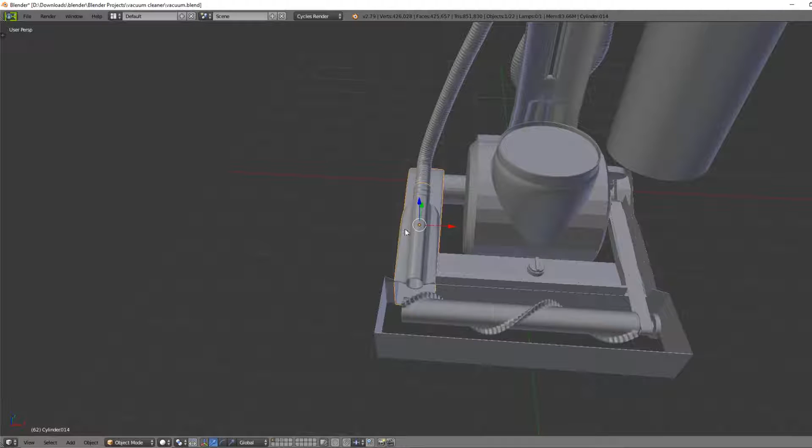So before I explain how this works, I'm just going to go through step by step and show you what would typically happen as you use a vacuum cleaner. So first off, you just have these rotating hairs and stuff pick up all the dust, and then the dust would eventually get transported to about here.

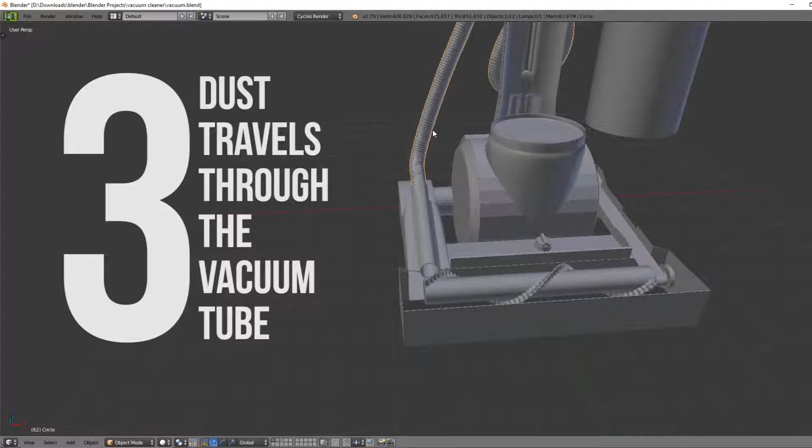This is where all of it gets sucked up through this tube all the way around, and now this is about step 2. Step 2 is when it goes through this tube, and then step 3 is when it goes all the way around this new tube, up and down and all the way around, and then out into this hole. That is where it enters step 4.

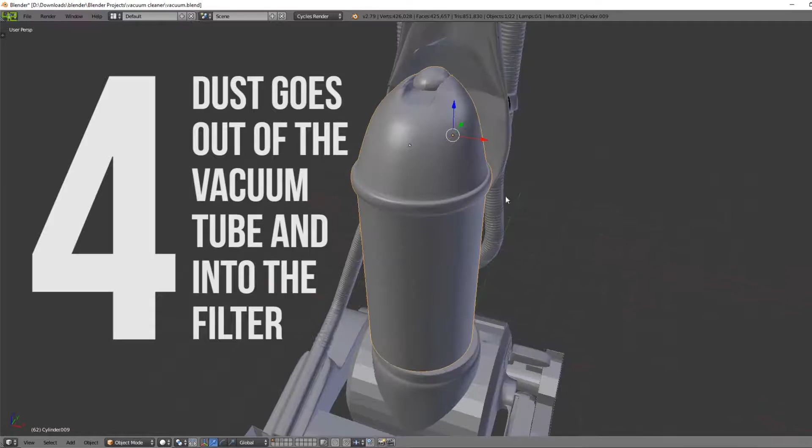Step 4. Step 4 is when it finally enters this huge filter, because that's basically all this is, it's a filter. And through this filter, all of the dust and stuff gets trapped right here. It gets trapped and it just sort of collects to the bottom. But all the air gets to pass through into this hole here. And so that would be step 5.

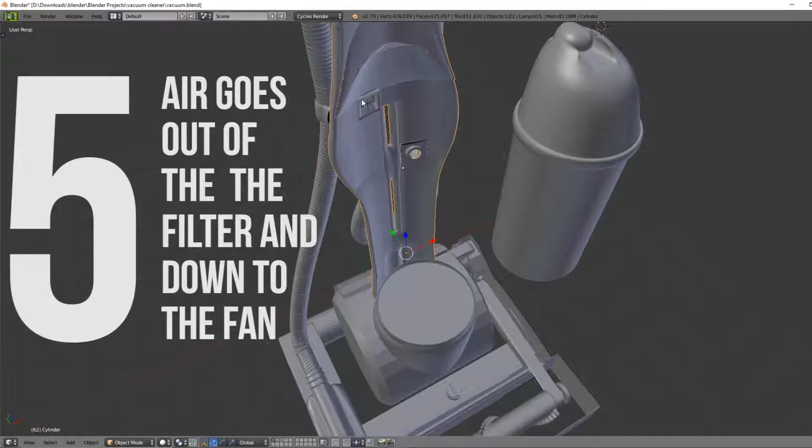And then at step 5, it's just sort of going down through this pipe, all the way down. And then you've got step 6, which is when all the air enters this vacuum chamber. Next, I'm just going to actually explain why all of this happens and how this all works.

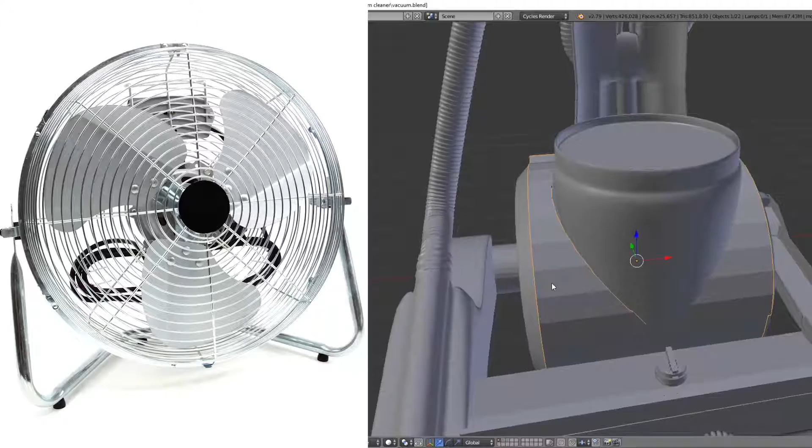So as I said in the other video, there's a fan blade inside of here, inside this little drum. And what happens is this fan blade spins, and just like with any fan, you've got the side that blows air at you, and you've got the side that's just sort of sucking in air. And the sucking side is very useful, because it sucks in all of the air it needs through this hole up here.

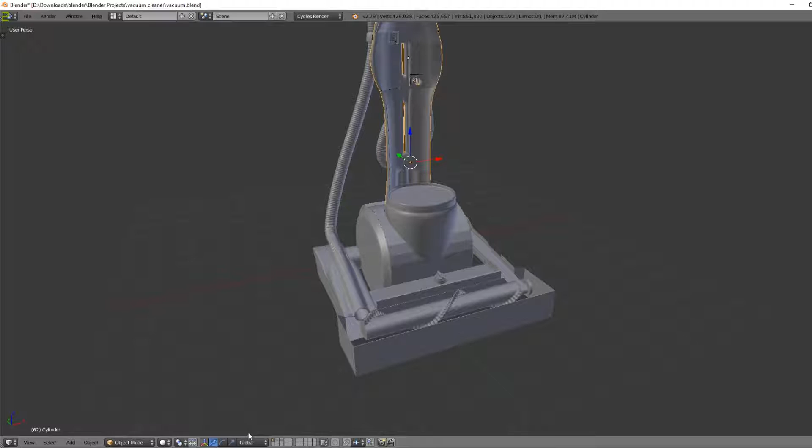Let me go over to it real quick. Edit mode. There we go. Let me get out of edit mode.

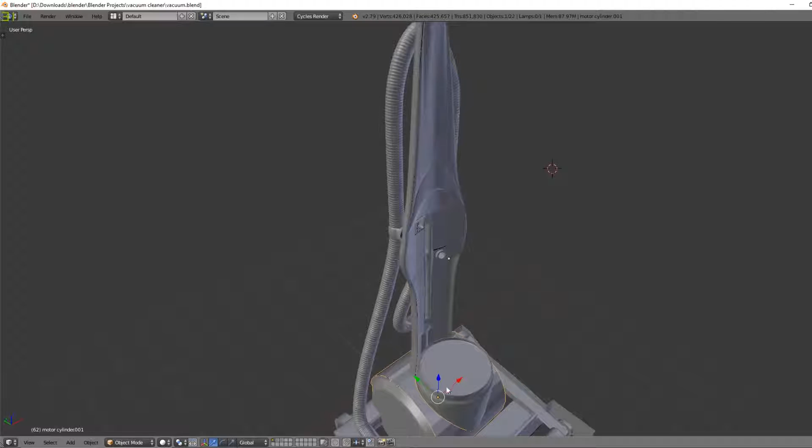There we go. So this hole is where all that air that the fan down here is sucking in comes from. I'll make sure you really get that it's a hole. See, it goes all the way down. It connects down into this base down here. So this hole is now just sucking in air.

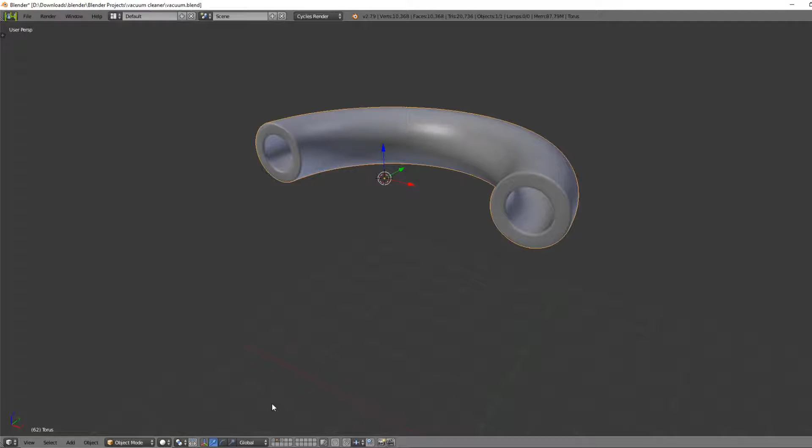And what we want is all of the air to be sucked in through this hole down here. So what we could do is just connect this hole to this hole, because this hole connects all the way back down here. In other words, if I just had some sort of pipe like this, just connecting this hole and this hole together, it would suck in air all the way through here, down here,

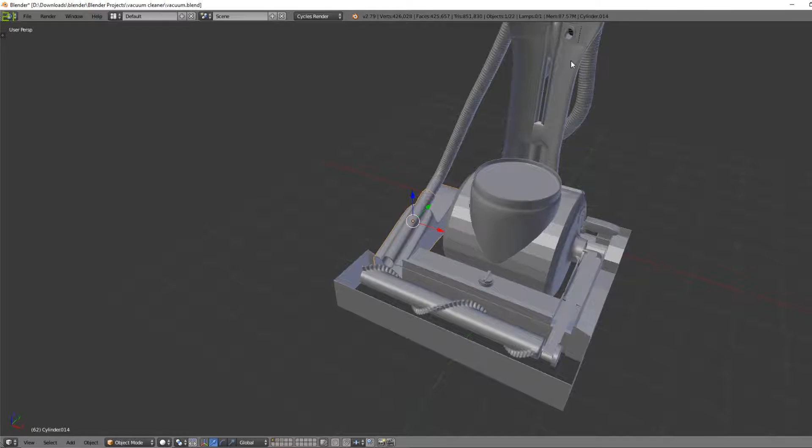and it would suck in the air right there. All the air would come in through this hole right here, which would be good, but you'd have a couple problems with just a pipe like this. The main problem would be that all the dust and stuff these hairs are picking up would go straight down into this hole, and then down into this fan, and it would just gunk up all the works. It would be really bad.

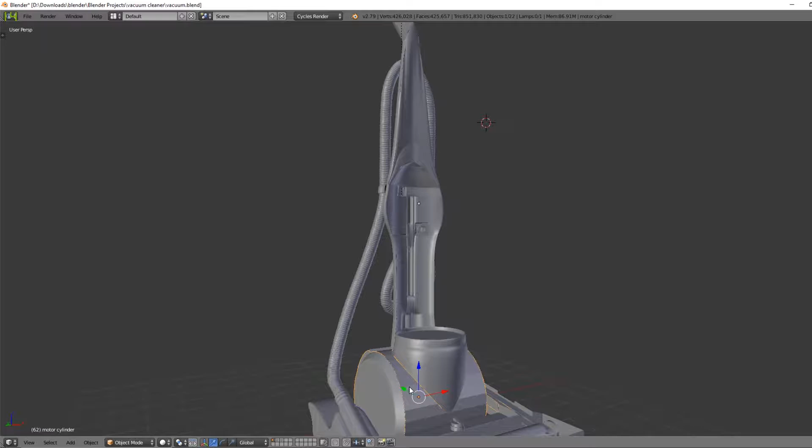All of your dust and dirt and hair and everything would just go straight into this fan down here, and it would probably stop working. In fact, it would be really bad because there's not really any good way to open up this down part. So all your hair would just be trapped in there, and it would eventually either stop working, or it would become filled up all the way.

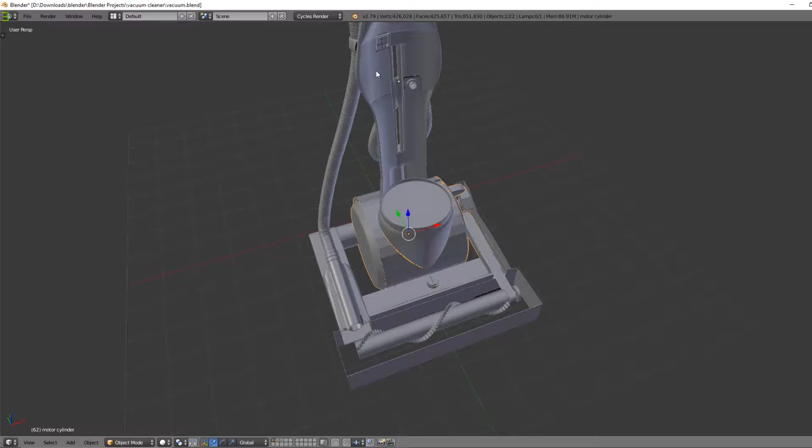So what we do is we actually put this on here. This is a sort of filter. This filter collects all of the dirt that comes out of this hole right here, and it gets collected down here. And then all the air can pass freely into this hole right here. And that's basically how the vacuum cleaner works. All the air goes down into this fan, and the fan just blows it out through some grills that would be here.

I didn't really want to put it there because it just wasn't that important. The air just comes out of there.

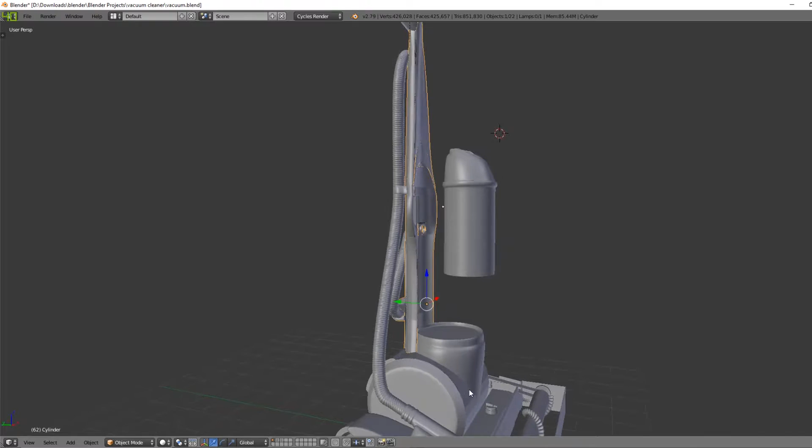It's not hugely important. Oh, it seems like my friend's playing some Rainbow. Is that gonna go? There we go.

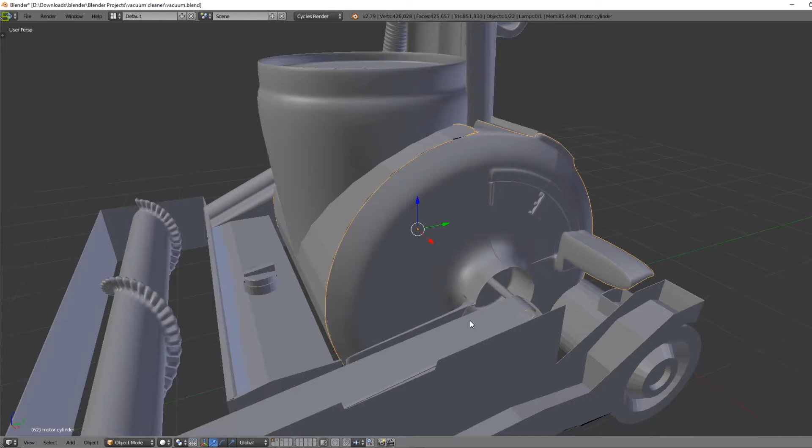But yeah, another little thing is this fan down here is spinning, and it's also connected to this shaft right here, which also spins. And that shaft is connected to this belt, and that belt drives these rotating hairs. So basically the rotating hairs can do this sort of thing. I believe that's it.